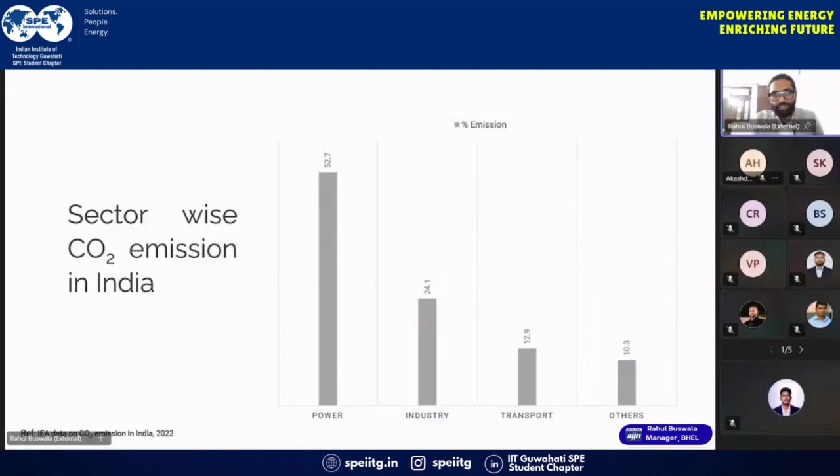Building sector, building materials, all those follow those major industries.

When we talk about capturing carbon dioxide, we have to look at the major sources of emissions in India and how we can control them. If you look at fuel composition, which fuel contributes how much CO2 emission in India, we see that coal has the largest emission in India at 72.2%, followed by oil and natural gas.

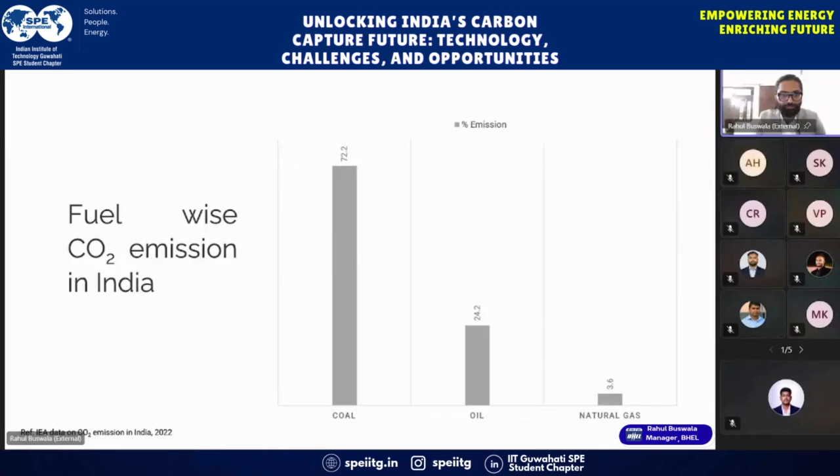Now moving toward the technology, what is carbon capture and why we are talking about it right now. When we talk about carbon capture, we are talking about capturing carbon dioxide from the point source or from the atmosphere. My particular presentation is focused on the point sources.

When I talk about point sources, it is about industries which are emitting carbon dioxide into the atmosphere - industries like power, steel, oil refineries - because they are the major contributors of carbon dioxide emission. The other way of capturing carbon dioxide is from the direct air, which we call direct air capture.

We know that from pre-industrial levels to present day, we have contributed CO2 into the atmosphere from 280 ppm to something around more than 400 ppm. So carbon dioxide levels are rising. This direct air capture is about capturing carbon dioxide from the air itself, but the major challenge of direct air capture is the cost, and it plays a major role when talking about deployment.

But when we are talking about point source capture of carbon dioxide, we see that industries which are emitting the most carbon dioxide in our country, and in fact at the global level, we have to find ways how this carbon dioxide can be captured.

The major challenge of carbon dioxide capture is not the capture itself, it is the utilization of carbon dioxide. Because if you are able to capture the carbon dioxide, what will we do with it? It again poses a big challenge how we are going to deal with the captured carbon dioxide. There are many ways people are working on, but still we need a cost-effective and viable solution. It's not that only a single solution is feasible.

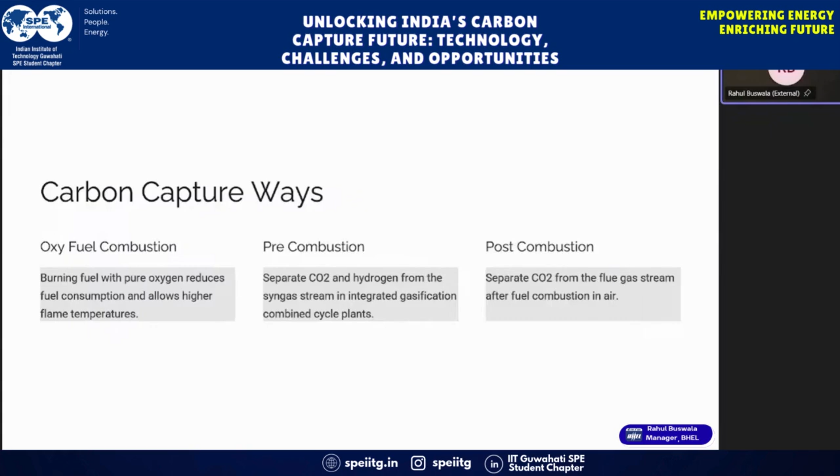Another way is post-combustion. This is the most feasible solution we are looking for. Why are we talking about post-combustion capture of carbon dioxide? Because in India we have industries which are quite new in setup. Their assets are nearly 10 to 15 years old. So it is not feasible to go directly into oxy-fuel and pre-combustion, because it requires a new plant to be set up.

In the post-combustion method, you don't need to disturb your existing setup. You just need to install another carbon capture plant, which will take the tap from your chimney and capture the carbon dioxide from your flue gases. So at present, industries are looking at post-combustion carbon capture as a possible way of reducing their carbon dioxide.

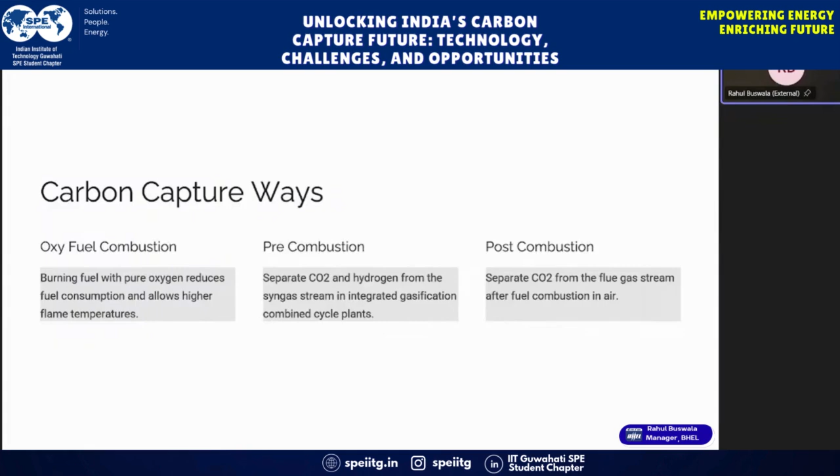Now, let me talk about post-combustion technology. What are the technology solutions available in the market? The first one is solvent-based technology, in which physical or chemical absorption takes place. For physical absorption, solvents like methanol or some specialized solvents can be used. For chemical absorption, special amine solvents are particularly used in the industry, which are effectively able to capture carbon dioxide from the flue gases.

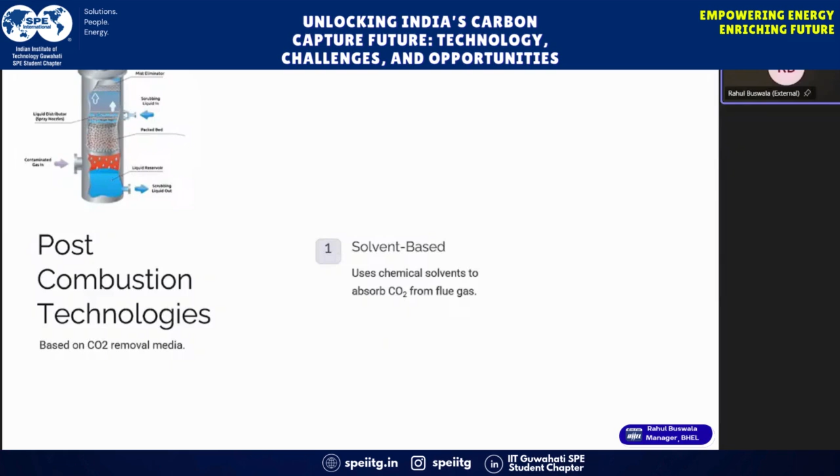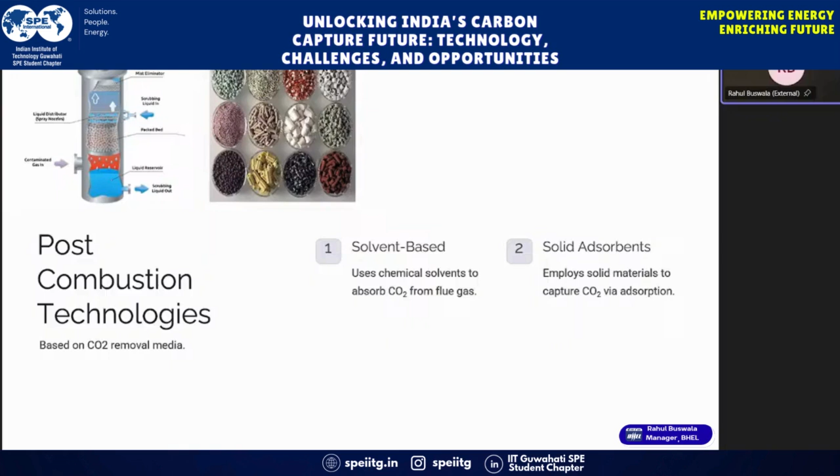Another option, which is also an emerging one, is solid adsorbents. Solid adsorbents are particularly deployed through PSA or TSA, pressure swing adsorption or temperature swing adsorption, in which a solid adsorbent captures the carbon dioxide from the flue gases. However, working with the industries at present, we found that it is not deployed on very large scales. When capturing carbon dioxide from industry, we have to see how a huge amount of carbon dioxide can be captured using this particular solution.

The other solution is membrane separation, where membranes are used to capture the carbon dioxide from the gases. There is also a very common method, in fact one of the oldest methods, which is cryogenic separation. Cryogenic separation is just cooling down the gases and separating them based on their liquefaction temperature.

So now we have to see which of these solutions are feasible to deploy in the industries. Right now, people are working on various solutions, and industry people are just starting to find out which solution is better suited for their applications. I have been working in these areas, and at present we found that solvent-based absorption, in fact chemical absorption, is more suitable for flue gases. Remember, I am talking about flue gases itself.

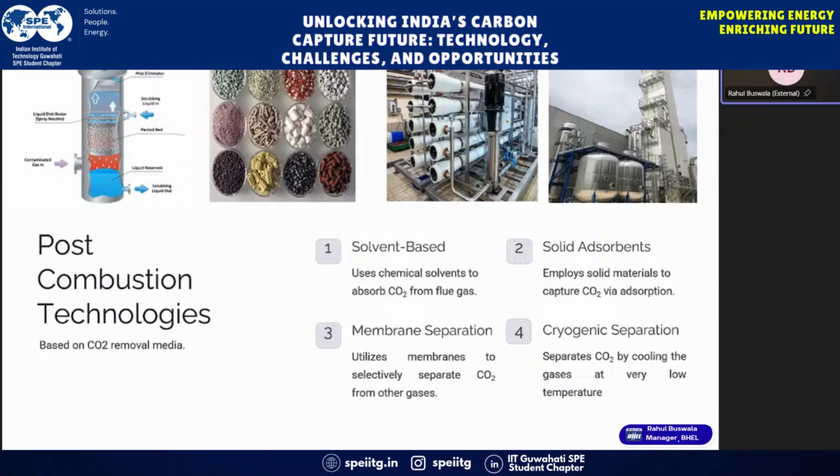Flue gases have certain other constituents apart from carbon dioxide which hinder physical absorption and affect the cost of capture, like the presence of SOx, NOx, oxygen, or other impurities like particulate matter. So people are right now looking at amine-based solutions, because they have large commercial plant references across the world running successfully to capture carbon dioxide from flue gases. So let me talk about post-combustion carbon capture with amine solvent-based technology.

In fact, I am talking about particularly this technology because at present, I am not talking about the future, because people are working on the other solutions also. But at present, when we talk about the capturing of carbon dioxide from the flue gases, this technology has the highest TRL, which is the technology readiness level, and it has a huge amount of commercial references, capturing from a variety of industries like power, cement, steel, and so on.

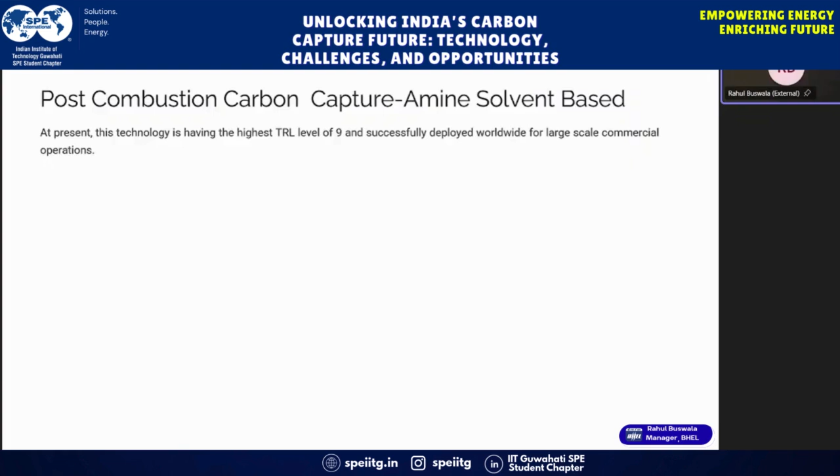So in this technology, chemical solvents are used which are amine based. It may be MEA, MDEA, or maybe a combination of several amine based solvents with some buffer salt embedded into it to reduce the impact of impurities in the flue gases. In this technology, you see there is a pre-scrubber. This pre-scrubber is just a column in which we wash the flue gases with caustic or some alkaline solvents, which removes the SOx, NOx, or other gases.

I'm particularly talking about the capture in this model, which I am showing you. It is the capturing of carbon dioxide from the flue gas of power plants, because power plant flue gas has SOx and NOx. That's why this pre-scrubber is deployed here. In fact, in some industries, it may or may not be required. It depends on the composition of your flue gases.

So from the pre-scrubber, the flue gases go into the absorber column, where they come into contact with the amine solvent. This amine solvent has a greater affinity toward carbon dioxide, which it absorbs from the flue gases, and the flue gases free from carbon dioxide are obtained from the top of the absorber column, and we get the rich amine solvent from the bottom of the column, and we are going to regenerate this rich amine in the desorber column.

You can say desorber column, regenerator, or stripper. There are so many terminologies used across industry. Basically, it is again an absorption column having packed beds, which increase the surface area between the solvent and the gases. In the desorber column, what happens? We provide the heat. With the impact of heat, this amine solvent emits the carbon dioxide, the pure carbon dioxide, and it regenerates itself into a lean amine, which is just CO2 lean amine.

So this captured CO2 we are going to compress, and we have to find ways it can be utilized for further application, whether we convert it into methanol, ethanol, or maybe go for EOR, which is enhanced oil recovery, or we can look for permanent storage. So in this technology, the key equipment are booster fans, the scrubber columns, the absorber columns, the regenerator, trim coolers, heat exchangers, solvent tanks, CO2 compression and storage, and reclaimers.

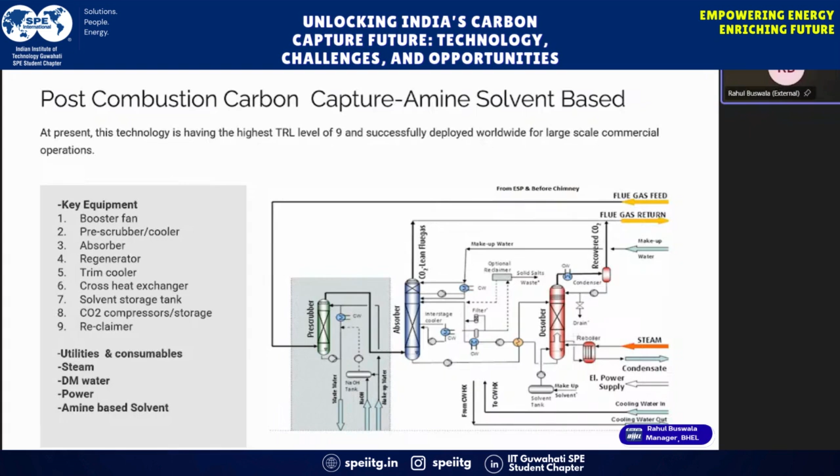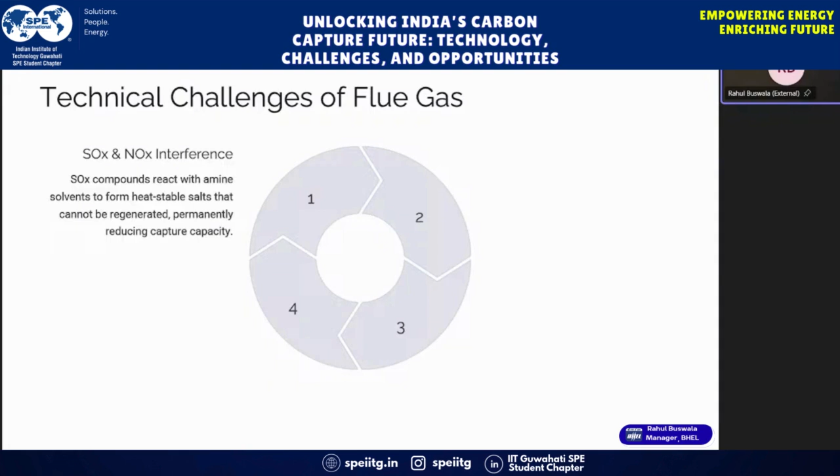So what are the technical challenges of capturing carbon dioxide from the flue gases? Let me go through the 4 major challenges one by one. The first one is SOx and NOx interference. In fact, the biggest problem of amine solvent is that it interacts with the SOx, basically SO2 from the flue gases. It forms heat stable salts. These heat stable salts reduce the capture capacity, and also require frequent refilling of solvent into this circulation loop.

There are also amine losses and corrosion problems. With this technology, there are issues of amine losses. The amine solvent, in fine droplets, will also go out with the flue gases into the atmosphere. So it again poses a big problem that some amine will contaminate the environment. So we have to see how we can reduce these amine losses.

And in fact, this amine solvent is very corrosive in nature. It is very alkaline. And when it comes into contact with CO2, it forms some kind of acidic solution. So we have to see how the corrosion problems can be dealt with. Because if we are going to deploy this solution long term, say 15, 20 years, then we have to find the correct solvent which will not have a severe corrosion impact on the columns.

There is also a great impact of oxygen. Oxygen accelerates solvent degradation through oxidative pathways. In fact, we see that most conventional amine solvents are not good at dealing with oxygen content of more than 1%. But with specialized amine solvents, people are claiming that their solvents can handle oxygen up to 5 to 7%. But still, we need to find further ways to deal with the oxygen impact on amine solvents.

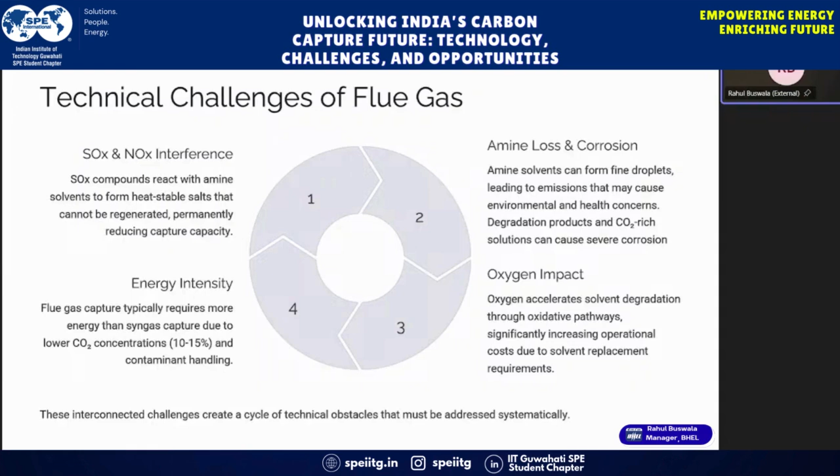Now talk about the post-combustion carbon capture. We have talked about the post-combustion carbon capture. Now we see how it will contribute in the CCUS value chain. We have to capture the carbon dioxide using the post-combustion technologies in which, as I told you, you have to capture the carbon dioxide from the flue gases of large point sources. Then you need to compress it. Compression also poses a big challenge.

I was also doing some study on how much the cost of compression will be in this particular cycle, and it is a huge figure. We found that the compression of carbon dioxide also poses a big problem because it contributes a huge cost. In fact, 20 to 30% of cost in this particular cycle is contributed by compression itself only.

Further, we have to find the ways where we can utilize this carbon dioxide. There are ways people are working on. In fact, maybe IIT Guwahati is also working on ways where you can utilize the carbon dioxide, and at present people are working in India. Like you can convert it into some fuels like methanol, you can utilize it in EOR, the enhanced oil recovery, and you can talk about the permanent storage of the carbon dioxide. But still the research is going on, and people are working in this particular sector.

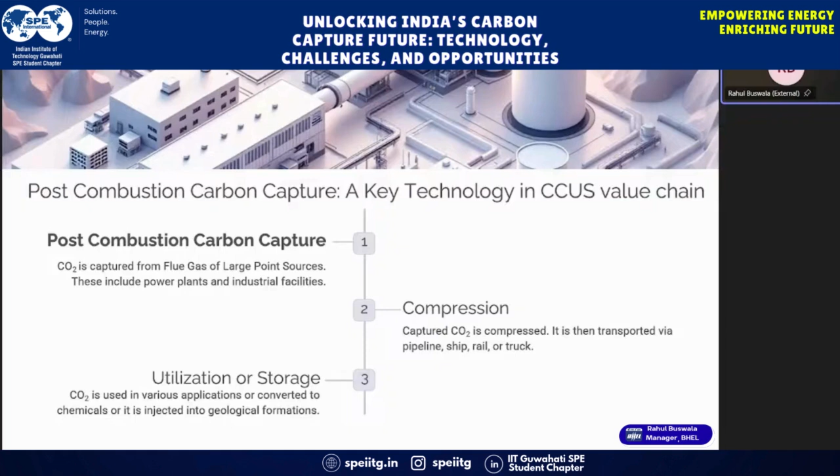So let me see the overall challenges with the capture of carbon dioxide by the amine solvent. We see that it is an energy intensive process. It requires a high solvent regeneration energy. It ranges from 3.5 to 4.5 gigajoules per ton of CO2 captured. People are working in this area. In fact, some companies are saying that they have reduced this regeneration energy below 3.5. But practically, when we have assessed those technologies, we found that those claims are not that promising, because overall the energy contribution lies in this range only.

As I told, the biggest problem of adopting the carbon capture is the end product, where we are going to utilize the carbon dioxide. In fact, I personally feel that this is the biggest challenge where people have to work, because in India, if we look at how we are going to reduce the carbon impact, we see that the government is working on hydrogen, on coal gasification, and is also coming with a policy for carbon capture. So when you talk about coal gasification or carbon capture, you need to find where we are going to utilize the captured carbon dioxide. So it's a big problem right now. In fact, people are working across the world to provide us some viable and cost-effective solutions.

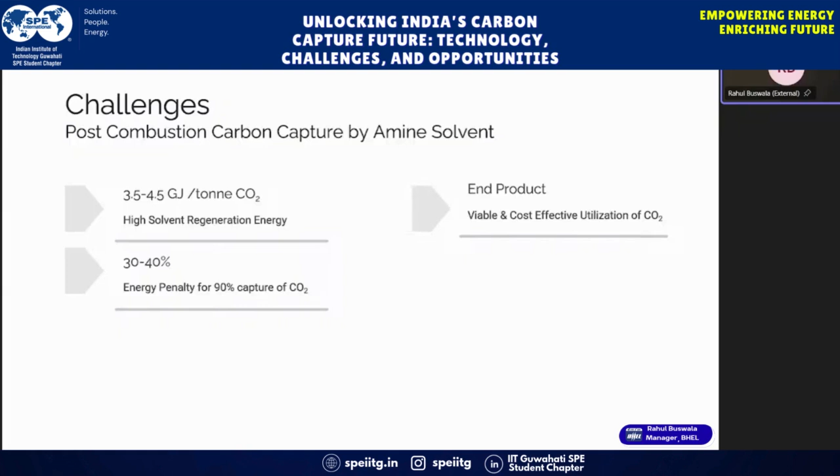The solvent degradation is also a big challenge, which I have already covered in the technical challenges. Also, the high steam requirement for this technology poses a big challenge. In fact, this energy consumption and high steam consumption are interlinked.

And the big challenge we are also facing is the emission of solvent into the atmosphere. In many cases the emissions are quite high, from 0.35 kg to, in some cases I have seen, 0.75 kg of amine solvent emitted into the atmosphere. And this amine solvent again poses a big challenge. It will also contribute to global warming itself. So we have to reduce the amine solvent emission from carbon capture plants. So these are the biggest challenges.

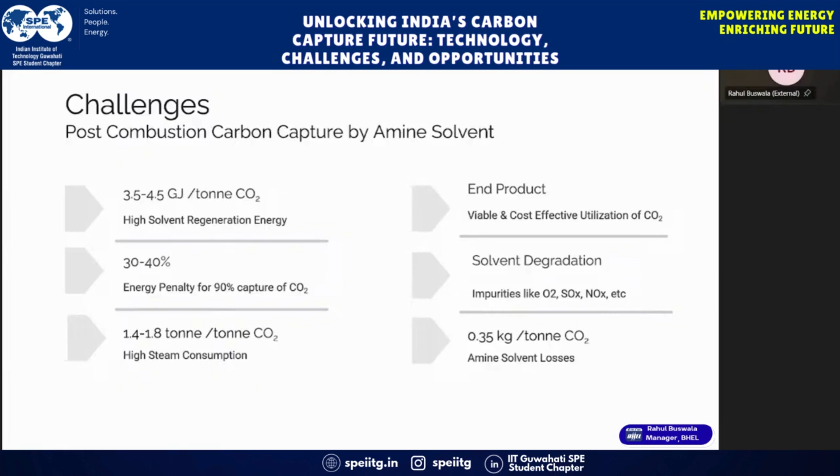Any questions so far? Anyone? We can take it at the end. Okay, fine.

So let's talk about the global carbon capture initiatives, how the world is working in this area. At present there are 45 commercial facilities available. I'm talking about the commercial facilities only, not about the pilot and research facilities. There are many more facilities at pilot and research level. But when we talk about the commercial scale, then the post-combustion carbon capture facility particularly

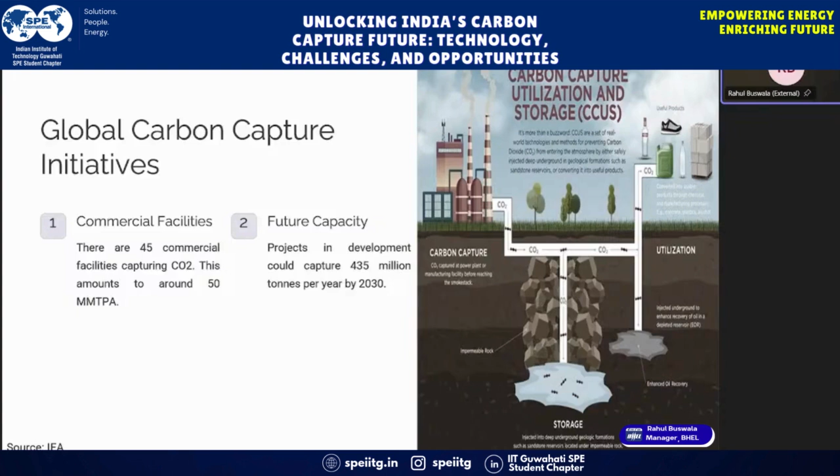The weather conditions are changing so frequently, which also causes a big challenge for industries to operate. So we have to look at it in that sense also, because we are losing those assets. If we don't take steps right now, we will have to pay for all of that, and pay much higher than what we are talking about investing in capture.

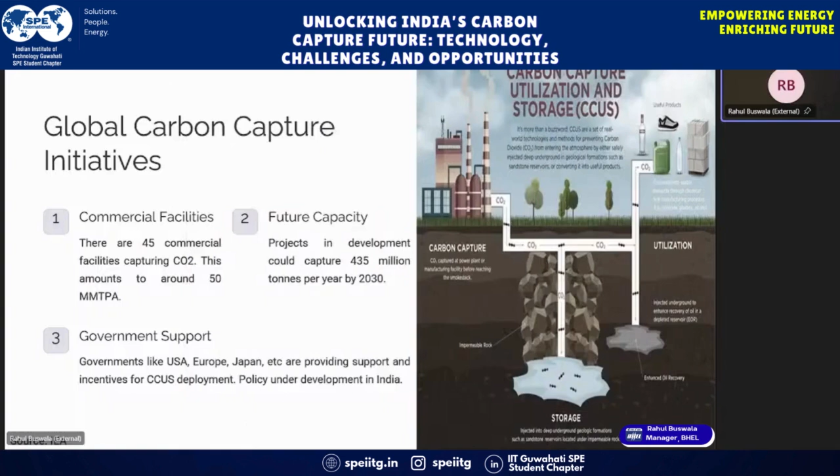There is a lot of government policy support from the USA, Europe and Japan, which are promisingly moving in this direction. Because of the time limitation, I am not going to cover each of these countries' major initiatives. I am just saying that there are some incentives. Some funding is also being provided. Viability funding is also being provided in these countries, which helps the adoption of carbon capture in these particular industries.

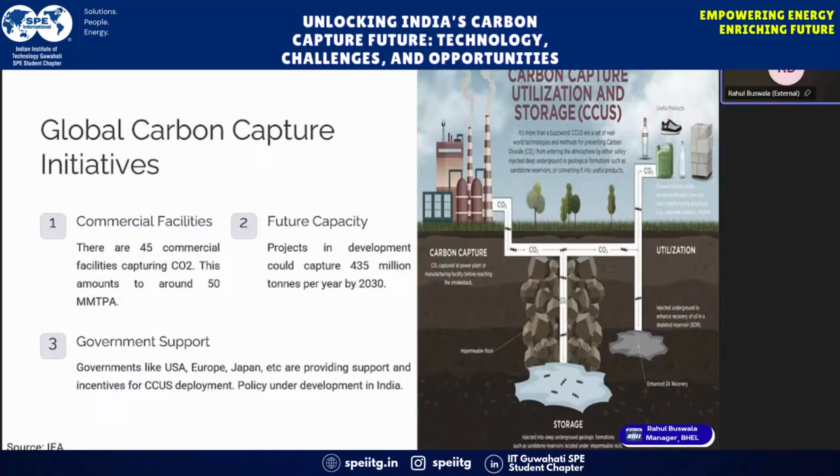So let's talk about the Indian scenario. In India, people have been working in this area for a long time. If I am not wrong, IIT Guwahati has also done a project with NTPC in the past on capturing carbon dioxide. But still, we don't have any promising technology, and we need to look further into our R&D, how we shall develop an indigenous technology for carbon capture. Simultaneously, we have to see how this carbon dioxide can be utilized.

So I am capturing the scenarios from 2019 onwards, because from 2019 onwards we see that the Indian government and industries are looking at this as a serious step to reduce their carbon emissions, in order to meet the global standards and global requirements. In fact, our businesses are also going to be hampered if we continue to emit carbon dioxide from the industries.

Many of you have heard about CBAM, the Carbon Border Adjustment Mechanism, which is going to be adopted by Europe in 2026. Then they will ask you how much carbon dioxide is embedded in your product, and if your product has a huge carbon dioxide emission, they will penalize you, and your product will cost more in that particular market.

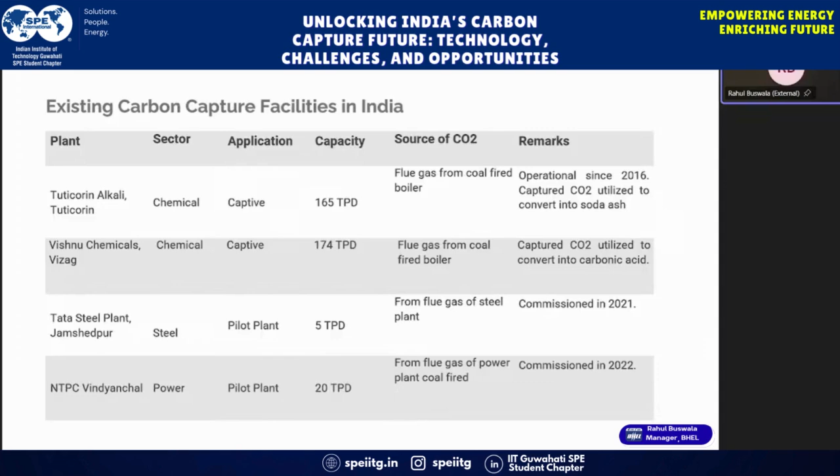So let's talk about the financial numbers. The financial numbers I have taken are from public sources. We are also working on how much large scale deployment of carbon capture will cost the industry, but I am not able to disclose it here because it is at a very premature stage, and further working needs to be carried out. So let's see what the numbers are.

For carbon capture cost, I am taking the example of a thermal power plant here. But for the steel industry, the cement industry, or refineries, the cost of capture is near to this only. It is not a big difference; you can't expect huge changes in the cost.

From the Niti Aayog report, they say around 800 crores of capex will be needed to set up a plant of 1 million metric ton per annum. But I personally feel this figure is quite low, because I am also working in this area and I found it may cost more. The setup cost will be much higher than 800 crores. Still, we are finding ways to reduce this cost, and we are hopeful it will not cross 1,500 crores, but at present we are finding it at a higher level.

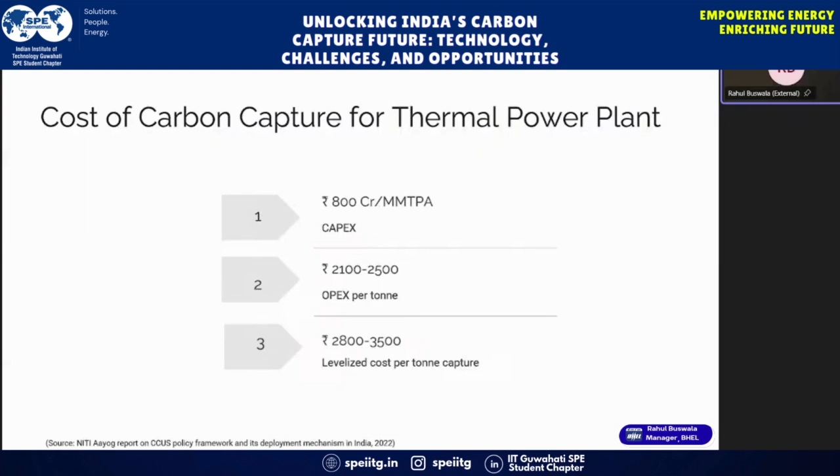So if you look at the investment needed when we talk about capturing carbon dioxide from our industries in India, we see that if we are going to capture something around 20 to 30 million metric tons per annum by 2030, then it will cost around 30,000 to 50,000 crores. So it's a huge cost to the industry.

This 30,000 to 50,000 crores may go up, because many of the plants which are at a very nascent stage are working on this, and they found that the cost of capturing is a little higher, because the cost of raw materials and construction has shot up. So we may expect this cost will also go up. But if you look at the long picture, if we have to be carbon neutral, some industries say we have to capture at least 750 million metric tons of carbon dioxide by 2050.

This capturing of carbon dioxide will require a huge investment, around 5 to 6 lakh crores, and that's just for carbon capture alone. When you factor in compression and utilization, the cost will go up further. Looking at the whole carbon capture market by 2050, covering the entire value chain from capturing to compression to utilization or storage, it ranges around 15 lakh crores.